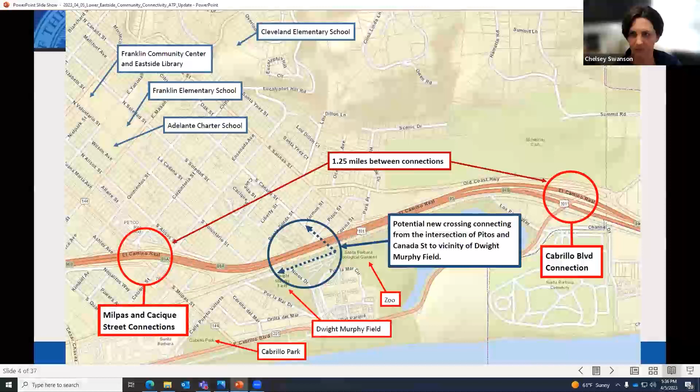The city adopted a pedestrian master plan in 2006, which is intended to enhance the city's walkability, increase connections to destinations throughout the city, and promote walking as a viable means of transportation. The pedestrian master plan recognizes the highway as a physical barrier to walking and biking between destinations on either side of it. Policy 1.4 states that the city shall work to eliminate Highway 101 as a barrier to pedestrian travel. The plan also identifies a possible future location for a new overcrossing between the intersection of South Canada and Pitos Streets and Dwight Murphy Field, as you'll see highlighted on this slide.

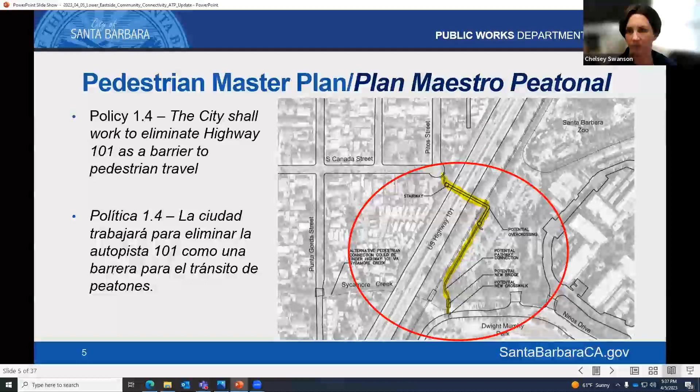As pedestrians and cyclists are the most vulnerable road users, the government shares a responsibility for safe streets.

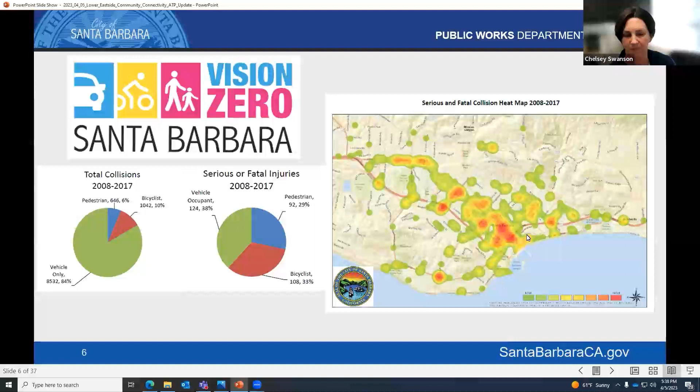In the fall of 2021, the city held community meetings both online and in person at the Franklin Center. Online surveys were also distributed to the community in both English and Spanish, and community members identified needs throughout the East Side for improving the walking and biking experience, which will be captured in the final plan. The purpose of the outreach was also to learn if the community still supported the city to study the feasibility of an overcrossing as shown in that pedestrian master plan.

Following the outreach in 2021 and with the community support, the city worked with our consultant Consor Engineering to study the feasibility of an overcrossing. The study includes preliminary environmental and engineering studies and also design concepts, and we'll be sharing the highlights of the study tonight. Lastly, because an overcrossing would interface with other jurisdictions, the city has met with Caltrans and the Santa Barbara County Flood Control to understand those agencies' concerns and input for a future overcrossing.

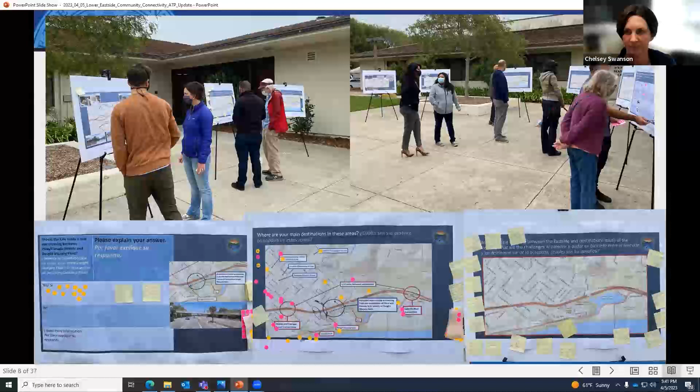So now we'll get into the feasibility study, and the next two slides are really a summary of what the main objectives were of the study.

They are to avoid or minimize infrastructure within Caltrans or Union Pacific Railroad right-of-way. The study was to provide 3 structural design alternatives and to identify site constraints like Sycamore Creek, the zoo parking lot, adjacent private properties, and ADA and accessibility requirements.

Our objectives were to identify hydraulic impacts associated with Sycamore Creek, minimize right-of-way acquisition, or in other words, to keep the infrastructure within city-owned property or right-of-way as much as possible. And finally, to develop final design and construction cost estimates for the future project.

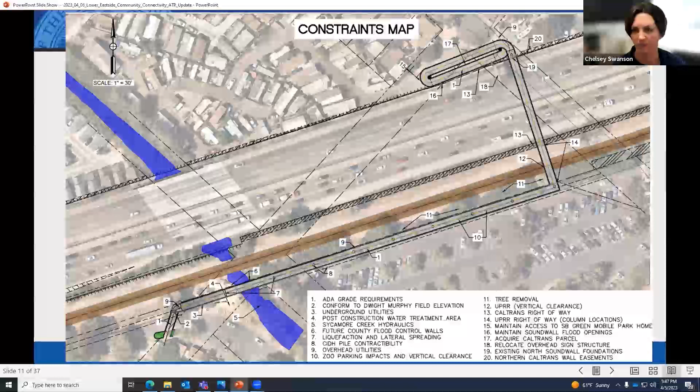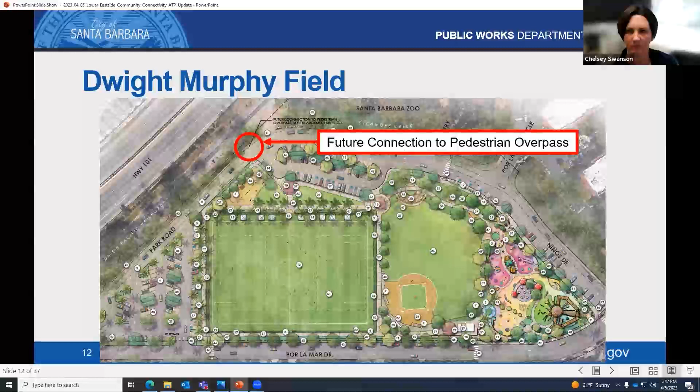Let's look over the 3 options that we looked at for the Highway 101 frame in the feasibility study. Again, this is the section that goes over the highway and the railroad right-of-way.

The downside would be more maintenance because it's a steel structure instead of concrete, and it would also need to be slightly taller than the other two options we'll look at next.

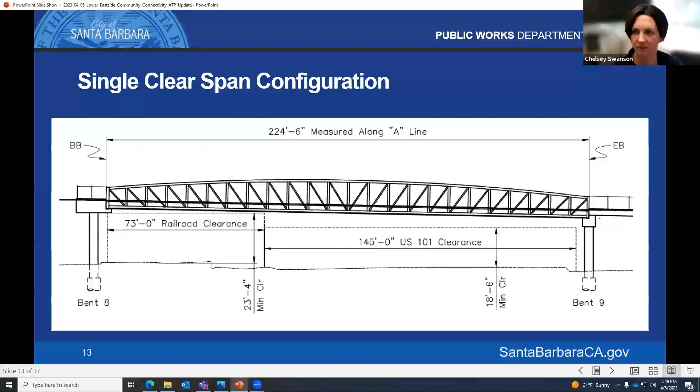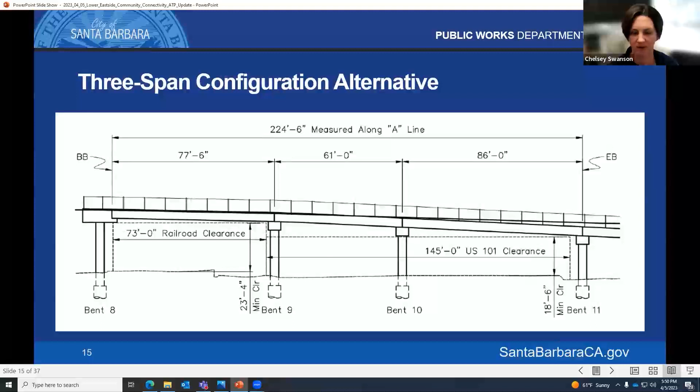The third configuration analyzed in the study we would call a three-span configuration, which would have two support columns in Caltrans right-of-way. It would be more aesthetically balanced than the two-span option and could be concrete for easier maintenance. However, both this option and the previous one would create permanent impacts to the highway and potentially more impacts during the construction process.

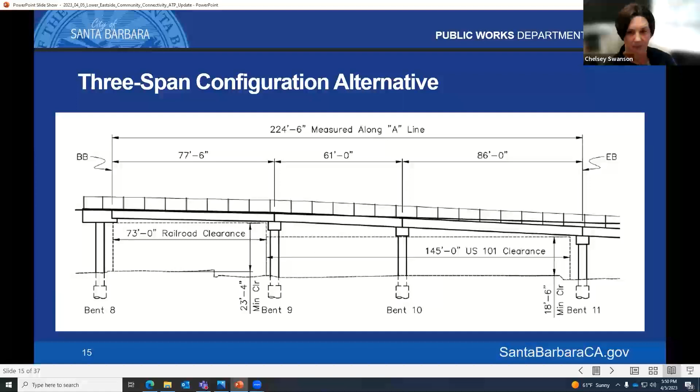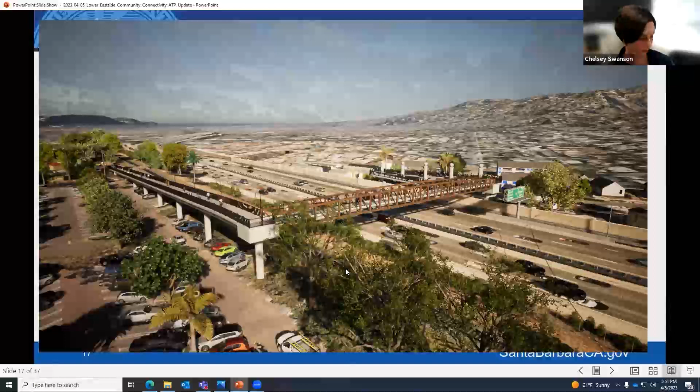This rendering shows a perspective of the overcrossing as if you were driving northwest on Highway 101, just past the Salinas Street exit. Again, Eastside neighborhood on the right side, zoo parking lot on the left.

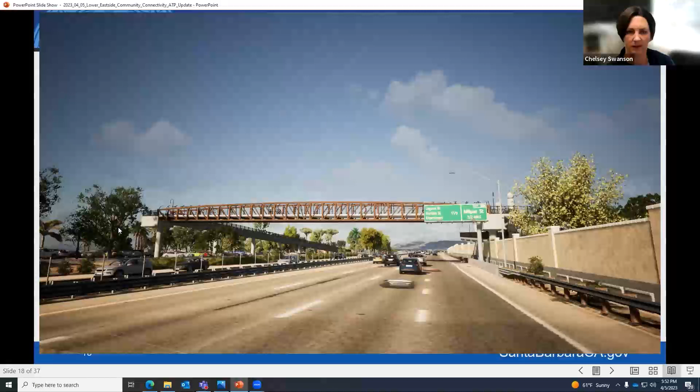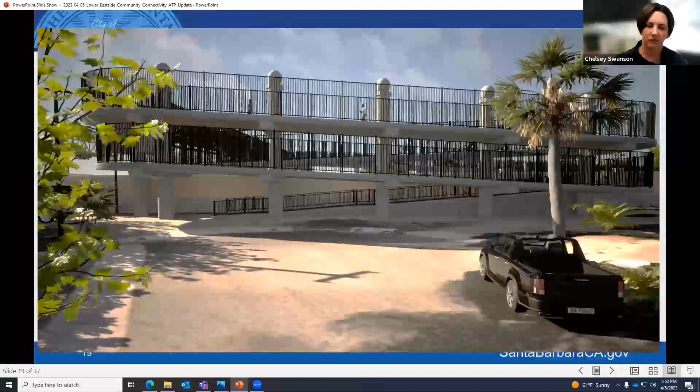I'm going to show a different option in the next rendering, and we'd love to hear the community's feedback and preference on the preferred alternative. This is the same footprint of a ramp, but with the lower railings instead of the higher.

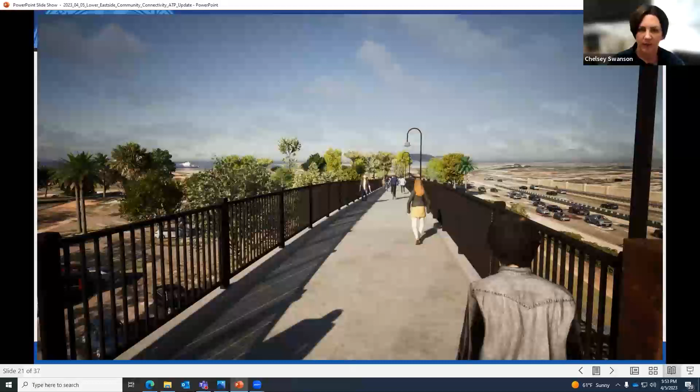This perspective would be as if you're walking on the south side of the highway, so through the zoo parking lot and towards Dwight Murphy Field.

I'll share a quick video that just shows a flyover simulation of what the overcrossing could look like.

Now that we've covered the highlights of the feasibility study, I'd like to revisit some of the other input we heard from the community and previous outreach, along with some of the planned safety enhancements to address those comments, and also recently completed projects in the neighborhood.

We heard that the preferred existing biking and walking route to get across the freeway is the Cacique undercrossing. However, some of the concerns were related to homeless activity and busy traffic in this location. We also heard that freeway ramps, roundabouts, and railroad crossings are uncomfortable for some cyclists and pedestrians.

We heard concerns about walking at existing highway crossings or near them, including the lack of lighting in some areas, missing sidewalk, drivers speeding or not yielding, and some homeless activity.

We also heard concerns for biking at existing highway crossings or near them, including a lack of lighting in some areas, lack of bike lanes, sometimes uncomfortable sharing the road with vehicles, and a lack of bike parking.

To address several of these concerns, there are safety enhancements within the neighborhood proposed as part of the city's capital improvement program. We're currently seeking funding for these improvements, and if funding is secured, they're anticipated to be constructed over the next few years.

So now that we've shared the highlights of the feasibility study and other improvements that are planned for the Eastside neighborhood, we'll discuss next steps for the planning effort.

We will have an in-person meeting next Wednesday at 4 p.m. It'll be outside in front of the Franklin Center. We'll be there from 4 to 6, and we'll go over the same information we shared tonight. It'll be an open house format, so you're welcome to stop by anytime during those hours. We will have Spanish interpretation.

After wrapping up the feasibility study, we'll be working on finalizing the overall entire active transportation plan. That will require the plan to go to the Transportation and Circulation Committee and also City Council for review and adoption. Both of those meetings will be open to the public, and we'll notify the public when they happen. If the final plan is adopted, we would seek funding likely in 2024 to implement the plan, which would be for final design and construction of the project.

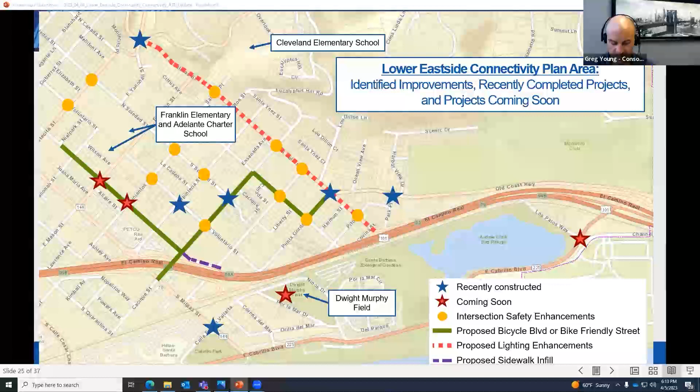Any other questions? Again, feel free to raise your hand or type them in.